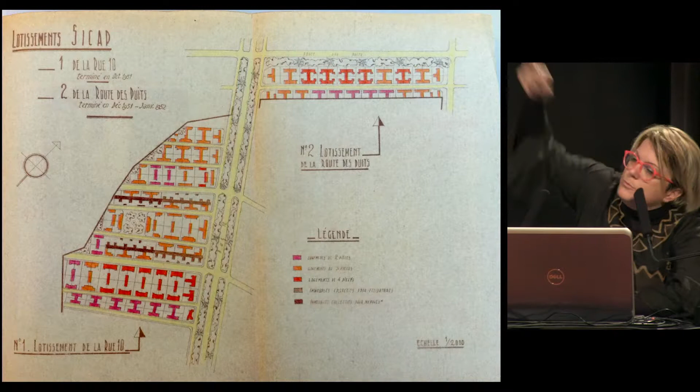So here you can see the first estate on your left, called the Rue 10, Street 10 - named after the street which is now Rue Galliop. And then the Route des Puits, which became Avenue Bourguiba, on the top right - a street that led to the puits, the well, in English.

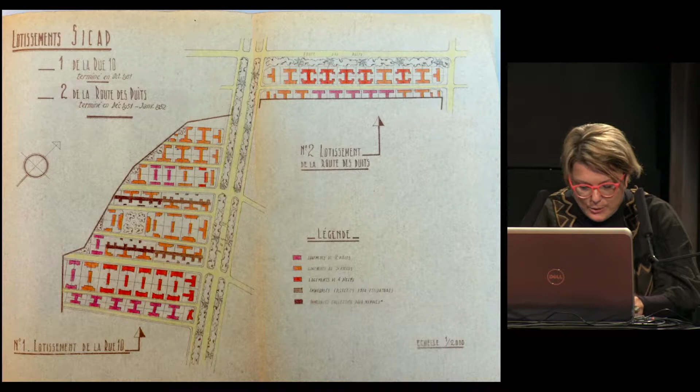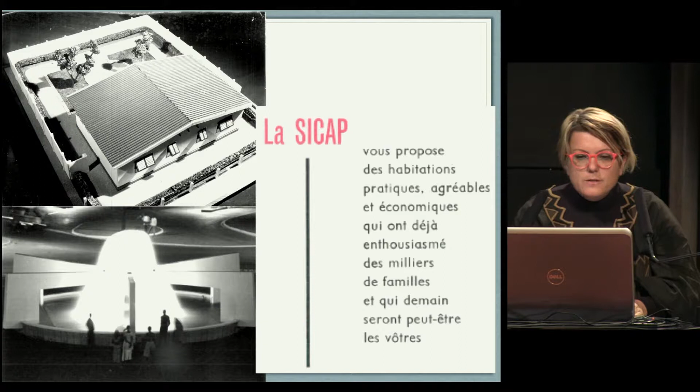So here you can see a model, a high-prestige villa, and below the fountain, where you can imagine people walking around in the evenings. A whole lifestyle proposed with these developments. Here are some green spaces, which are now occupied by recently built blocks. Another brochure in 1996, proposed in Istanbul by the SICAP.

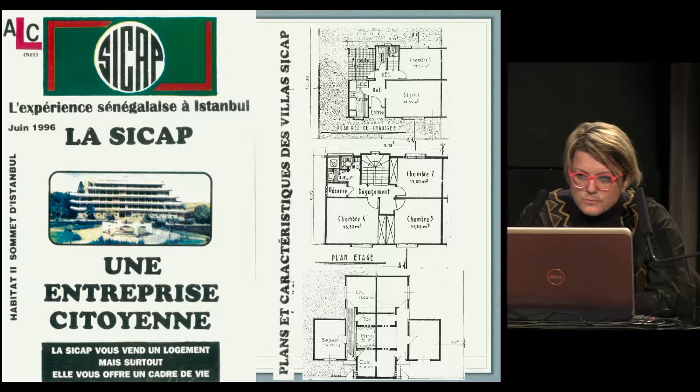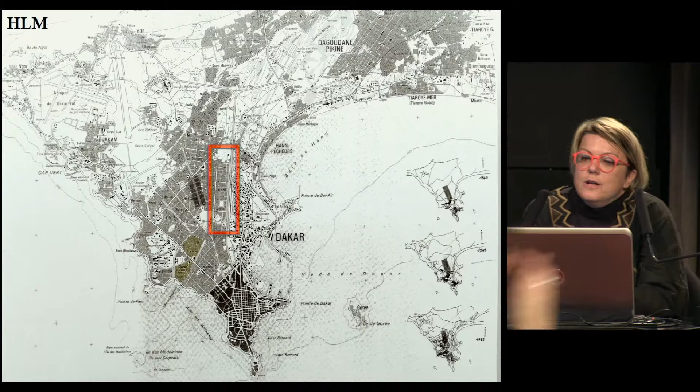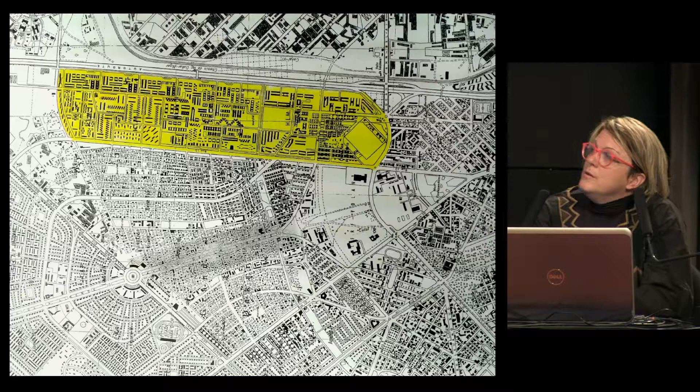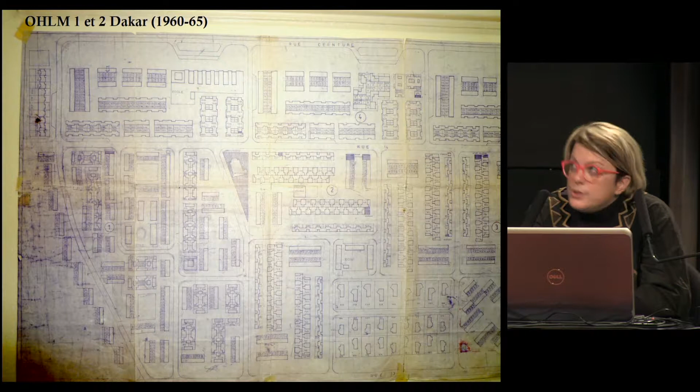So HLM, the second case study, you can see the variations of different kinds of building, different kinds of apartment building and house. This is 1960 to 1965. This is the original plan, which I found in the archives of HLM. I'll go quickly through.

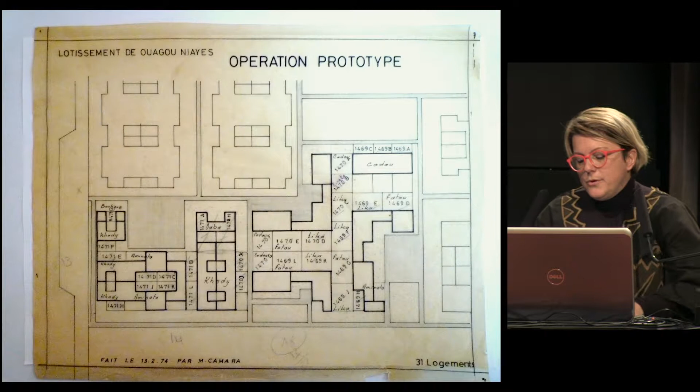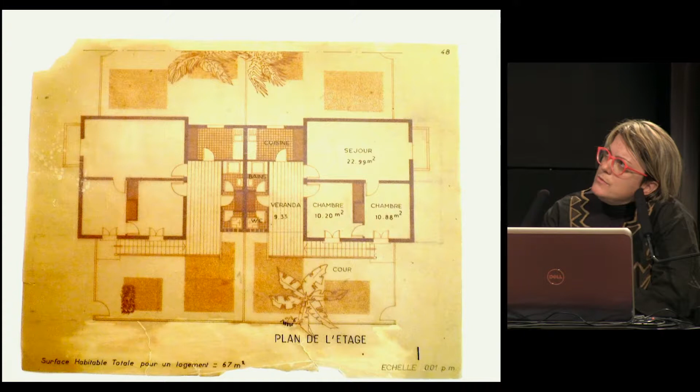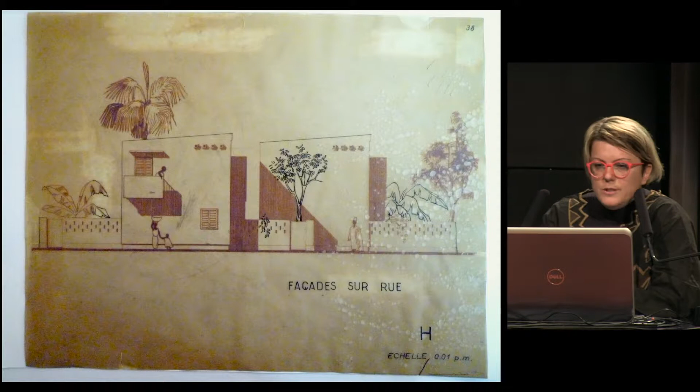So this prototype operation, which was home for the technicians who were working on designing the HLM, that was like a pilot that they carried out. And here are a series of drawings. I found hundreds, but they're not quite filed properly. So you'll have a fairly good idea of the changes that have been made when you look at the photos. For example, the facades, you'll see them this afternoon.

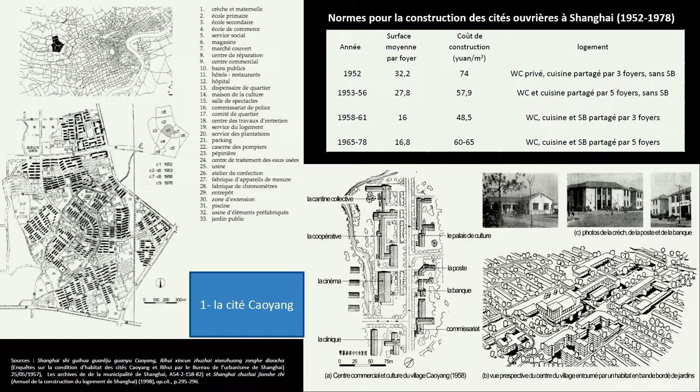What would become of these households, of these houses, these dwellings? Before asking this question, I'd like to present you the different typologies. You'll see a terrific fall in investment and in size. This was presented in Yang Chen's thesis. You can get it from the school.

So here are the different types from the cité here, 1952. There's a certain sociability, a certain quality of the environment and of materials. The idea was really to pursue the dynamic of the new towns of the 1920s and 30s.

But when we look at the new 5-year plans, the aim was to build quickly, the quantified system under the communist system. And of course, at the same time, the aim was to reduce construction costs. And what we see is the standards.

There was a shift in the standards for the new man. We shift to a complete shift to standards based on the idea of reducing construction costs, because we are in a country that does not have the resources to meet its ambitions. Because in Shanghai, we're in a town, in a city.

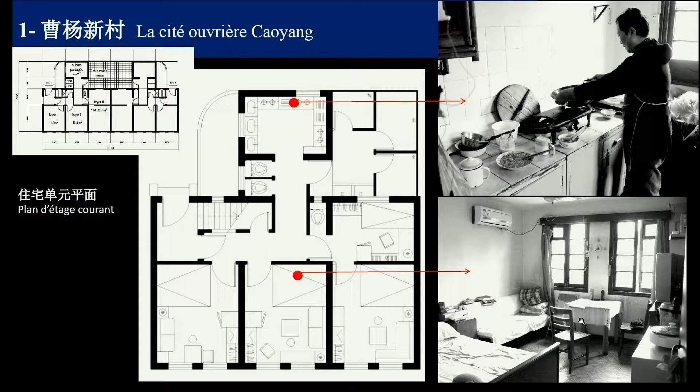So what we see here is a shift from the Lilong built at the end of the 19th century. Although this photograph is quite recent, the dimensions of the rooms are quite generous. The ceilings are quite high. Though this space, with the proliferation of families and family sizes, was going to become much more restrictive. So in the 90s, the major change was in the status of housing.

The initial status was that employers would allocate housing; the employer could be an administrative service or an industrial company. So there was a shift from housing that was allocated to workers by these structures to housing that people could buy. So you can imagine the changes that this brought about. And I'll talk about that a little later.

What we're seeing is a huge burden. How can you house an excessively numerous population? In 1990, there were 4 square meters of space per person in Shanghai.

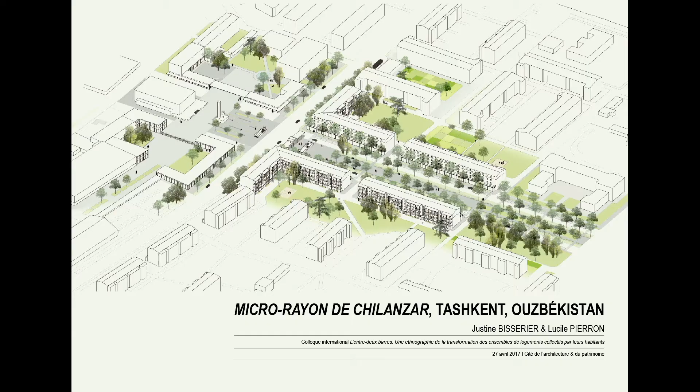We propose that you look at this issue of the transformation of collective housing by the inhabitants through a district built in the Soviet era using the construction principles of the micro-district. This huge complex is called the Chilanzar collective.

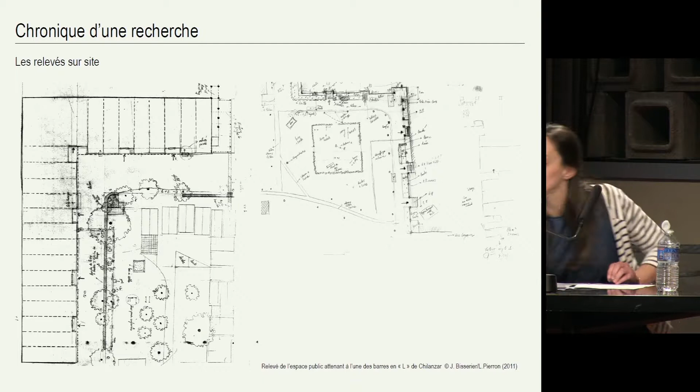So it is this field work that gave us a close understanding of the district, and particularly the practices of the people. This was done through a tool that is excellent for making the comparison between designs produced by architects and the practice of inhabitants.

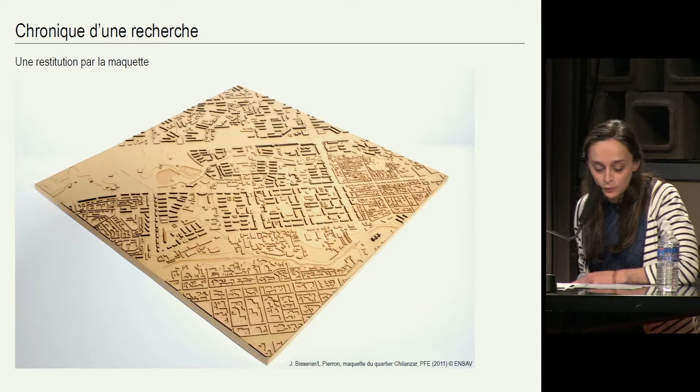So this combined survey of the district made it possible to produce a much more precise plan, as you can see here.

So to study this transition between design space and the space produced and lived, experienced by inhabitants, means that you have to understand the first stages of the construction of the city of Tashkent.

Obviously, we can't be comprehensive here, but we suggest certain interpretations of the morphology of Tashkent, which is very complex, characterized in its urbanization by the juxtaposition of clearly identifiable urban fragments.

First, the city Caravanserai on the Silk Route. Uzbekistan was on the Silk Route. It then became the capital of the Russian Empire of Turkestan in 1865. Then Uzbekistan, a state created by the Bolsheviks in 1924.

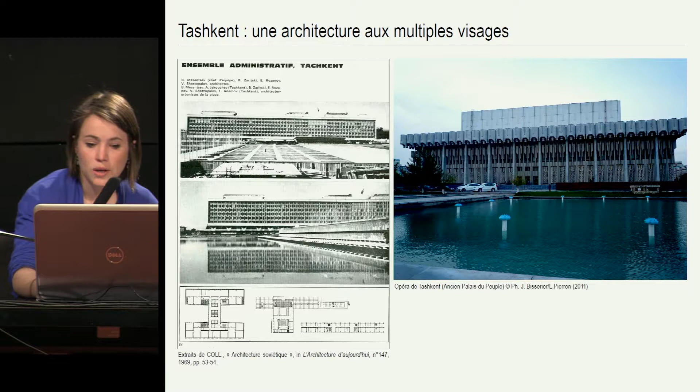And equally interesting objects in terms of their monumentality in the period, with the Tashkent Opera, built in the same period. And then next to it, these structuring objects in the urban landscape, we find these huge collective housing structures built using prefabricated construction methods.

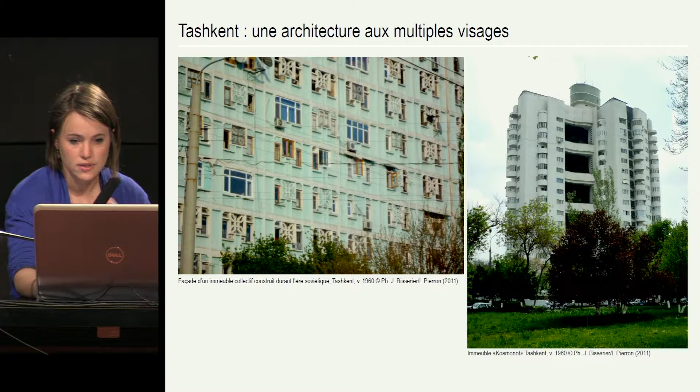So a photograph of a quite ordinary facade. And then we have a tower block, which we found interesting in our two study visits. The Cosmonaut building, which bears witness, apart from this ordinary construction, to a real commitment by architects to renew the architectural language of collective housing, a sort of laboratory of ideas about

habitat in that period. In order to present the district and its presentation, we'd like to take a step back in order to try to understand the space originally conceived by architects and urbanists. So what you can see here is two documents. They're quite rare documents, historic documents, one of the few which we could access, because these are documents that were published. So you have the project plan, where you can quickly see how it's built. So wide avenues, small blocks, within which you find amenities generally.

And then on the side, next to it, a project model, a photograph, which shows the strictness imposed on the construction of the whole Chilanzar district. The idea which you can see with the amenities in the center of the small complexes is the idea of the micro-rayon, the micro-district, the strategic position of amenities within these small structures.

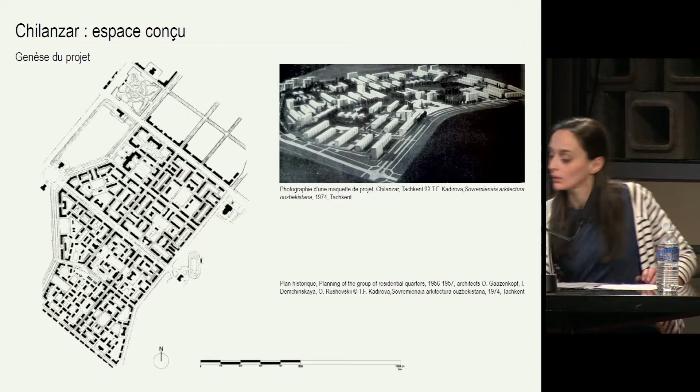The idea is to go back to the super blocks built in 1936 in Moscow, but the micro-rayon, the micro-district, is the smallest unit in the functional city sought by the Soviets. And this model would spread throughout the USSR in the second half of the 20th century. Those of you who've traveled in ex-Soviet countries, you'll recognize this plan.

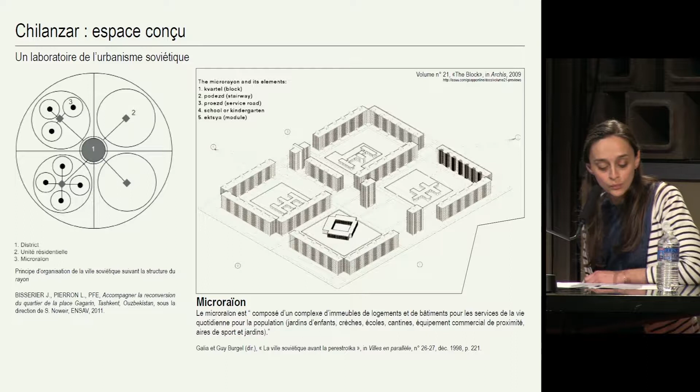The city is designed at 3 scales: the micro-district, the district, and then finally the municipality. So the idea is to start with a small micro-rayon, a micro-district, with amenities, which is designed to be an autonomous unit. The use of this generic and tested model, built on the whole of the Soviet territory until the 1980s, was to speed up the planning process in cities and to guarantee rapid production of several thousand housing units designed to provide housing needs for a fast-growing society.

In the model, you can see maximum distances between dwelling and amenity, so it should be accessible on foot, and so that children going to school should not be affected by cars. So it's a distance of about 500 meters. Here we can show the drawing, which shows the itinerary of children traveling around their micro-district, either to shops, to play areas, or to school.

The dimensions of the new district were also designed to maintain a balance between housing and the different urban services in order to optimize the distance of daily travel. Most of the cultural and community services are placed at an average distance of 600 meters from the housing area. In other words, accessible on foot in less than 6 minutes.

Each residential unit was equipped with leisure amenities like a cinema, theatre, or medical dispensaries no more than 1 kilometer from home, while larger amenities like hospitals, stadia, and administrative centres should be within a radius of 1 or 1.5 kilometers, i.e. 10 to 15 minutes on foot or 5 minutes by car.

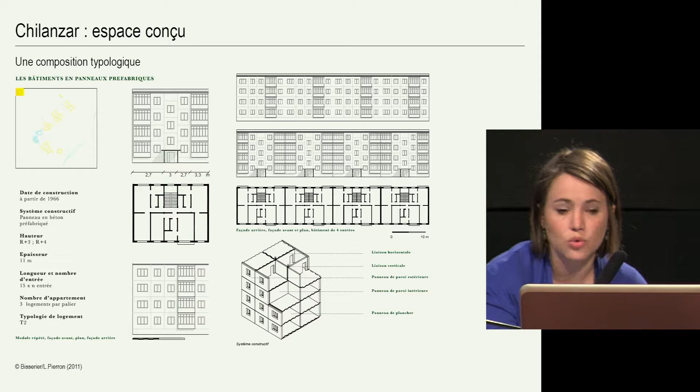In the district initially, and according to the project plan, you only see one typology of buildings, which was envisaged, and only one form of construction method, which is 4 or 5 floor buildings made of brick in the traditional style. But after the earthquake, the new choice made for construction was prefabricated methods of construction, where you have fairly small units as well, remaining with 4 or 5 floors, but using a method of construction that was faster and cheaper. So in terms of identifying this kind of typology, as you can see on this plan, I don't know if you can tell with the colors.

What's important to identify is that all this part you can see on the eastern side corresponds to the first phase of brick buildings, 56 to 66. And after the earthquake, you can see that they were exploring the new construction methods, which are the yellow buildings on the map, on the drawing.

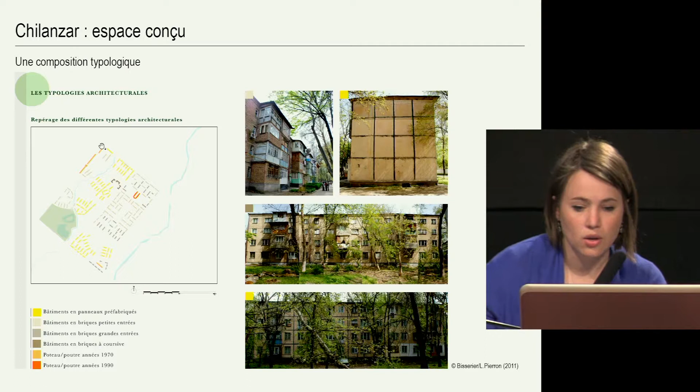So the prefabricated panels you can see here, they're quite powerful images of the construction methods used. They were built either at the heart of blocks, and then on the urban edges they explored a system of larger blocks, and in particular higher blocks, which made it possible to structure the whole of the micro-district.

The rigor we talked about, this typological rigor, strictness, which is obviously imposed by the economic and functional objectives, nevertheless included a landscaping which is quite pleasant and attractive, with vegetation and semi-green areas covering almost 80% of the ground area.

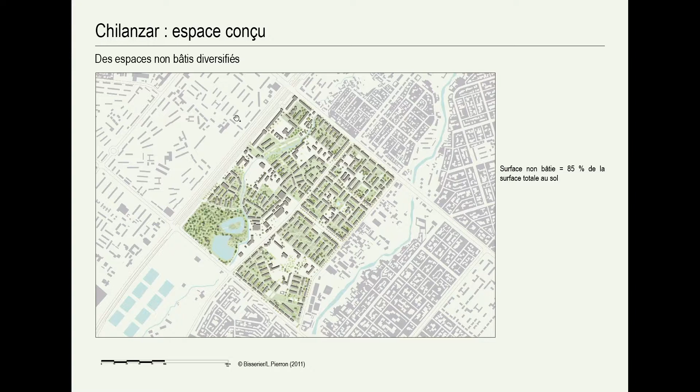These micro-districts are also structured by avenues of trees at the edges of the urban front to form a sort of green belt. The focus on squares and public areas for each of the construction blocks added to the pleasure of the human experience in living there.

This pleasurable aspect of living, which you find in Chilanzar, had a key function by protecting people from the winter weather and also offering cool conditions in summer. So this is something that we found surprising on the ground.

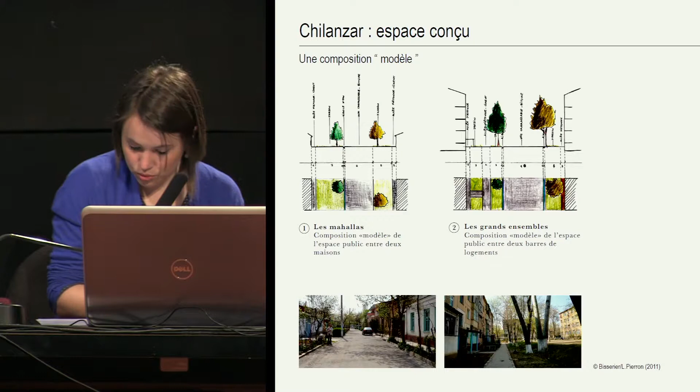On this drawing, you can see dimensions that resemble the grid structure of the Mahalla. So you can see the model is a rationalized model, a globalized model, but there is a tendency, particularly in the public spaces, to return to certain models which existed already in Tashkent and resemble the more traditional districts.

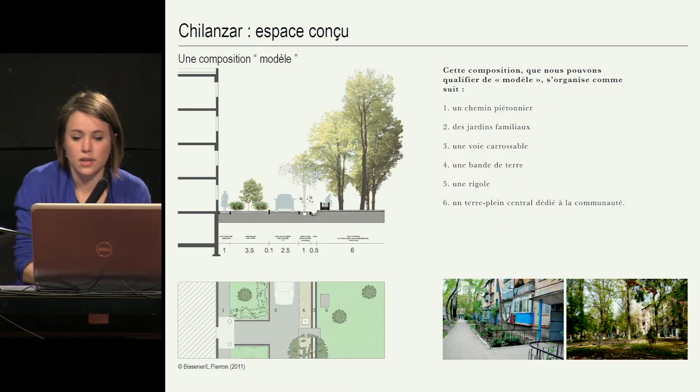And these garden courtyards also correspond to a standard profile. It's perhaps something less known about the micro-district system. There are very clear typologies, buildings based on distance, but there's also a standard design in relation to public space, and this is what we call a model composition, which involves a pedestrian route, family gardens, and then a central space dedicated to the whole community.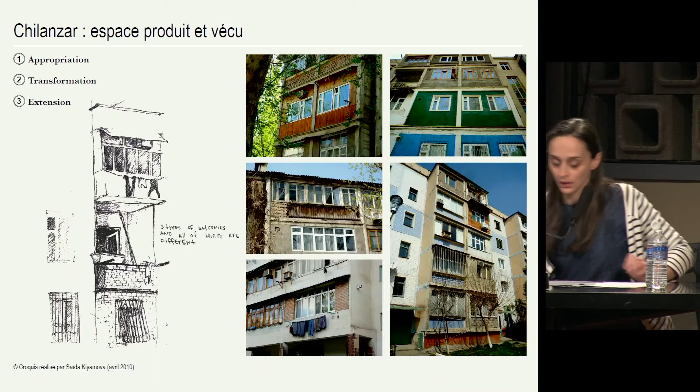So this knowledge of the initial model enables us to measure the changes and transformations that have gone on in the last 50 years, and to understand space as the inhabitants produce and experience it. As in many other public, collective housing areas, there were big changes in Chilanzar. There was a gradual, steady impoverishment of the population, sanitary problems, hygiene problems, combined with poor housing and acoustic conditions.

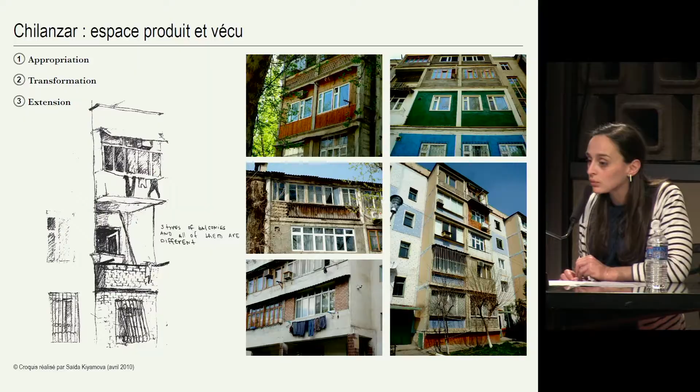So the failure of the Soviet city model to correspond to the needs of Tashkent led to aspirations amongst the people for larger residences, and that encouraged a new architecture that tended to assert the role of the individual in society. So, with the original strict design of the master plan, we see adaptations made by people, which are a combination of appropriation, transformation, and extension.

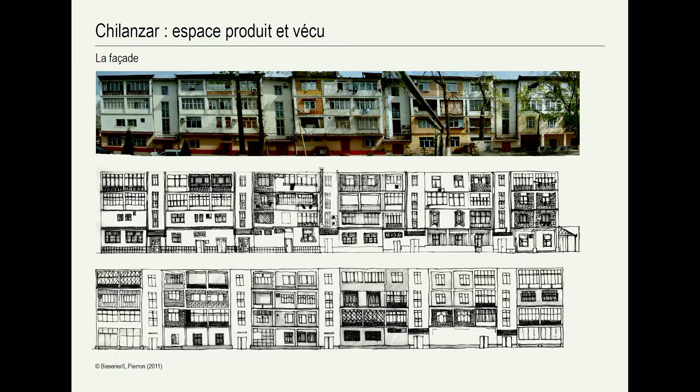So as you can see, there are very major changes in the facades, given their intermediate situation between public and private sphere. So now what we're seeing is a real patchwork of social practices, which reflects a number of individual and collective actions, from ordinary changes to very inventive changes.

So we can see appropriation, and now a total transformation of the facade, creation of private entries, either on the ground floor, which is probably the most common, or even on the upper floors. So you see staircases, and then a third degree, which is extensions.

And here you see a real extension of the home, which is a general densification with the creation of additional rooms, which is really quite remarkable, as you can see on the left. The extension of the loggia, the angle of the mass, or the extension of the apartment on the ground floor, which is perhaps the most common, most obvious type of extension, but which involves a privatization of what was initially a public space.

So this range of variations can also be seen in the loggia, which is generally used in the typology of buildings in Chilanzar. There are a few loggias that have retained their open and maintained spaces, many of them being partially or fully closed in to constitute additional rooms.

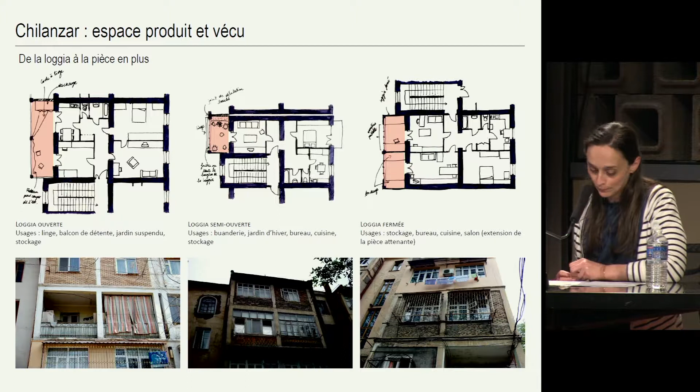And finally, the closed loggia, where the fronts have been closed in with bricks and the rooms narrowed in order to make an extension of the lounge or an additional room giving onto the outside.

So here we see the changes on the facade. There's been no specific regulations on this. As you can see, there's a wide diversity of methods of closing in the facades, which is shown fairly clearly on this photo. And the big concern regarding these modifications is that the initial structure of the building is not really suitable for the changes, and some of these brick enclosures on the loggias can threaten the fabric of the initial concrete structure.

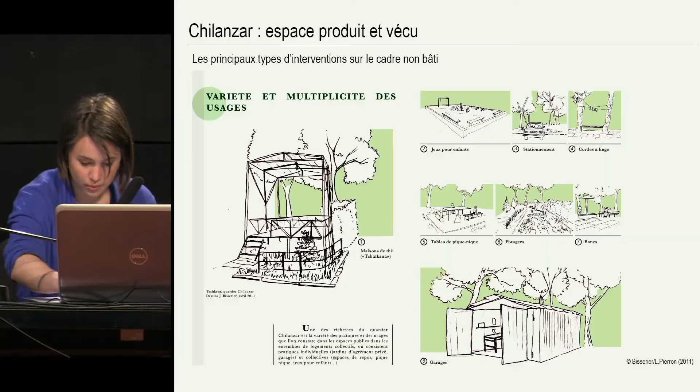So this wide range of changes has huge potential. As you can see on the outside spaces, there's a wide possibility of alternatives, people building their own vegetable gardens, building sheds or terraces. So this external space is the main method used by inhabitants to enrich their social lives and community lives.

So we're seeing a privatization of space designed to extend the domestic space through the appropriation, not to say the seizure, of part of the initially public space in order to incorporate it into the private domestic space. So from this observation, we can see that there's been a change of use, but also a modification of the status of space. So we wanted to work on this delimitation, this demarcation of space, these new boundaries introduced into the public space.

So this is brought about by various forms of barrier, here fences or brick walls or concrete walls, or sometimes less firmly through strings and cables. In addition, there is a slightly different treatment of materials, where people are using concrete, people are using rocks, people are using pebbles to delimit space.

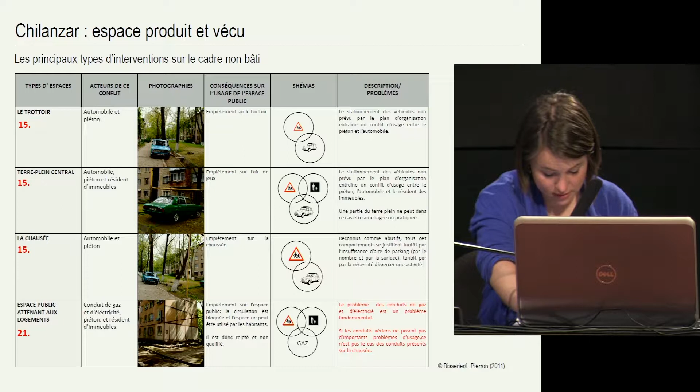And here the final transformation we identified, differentiation in terms of use. This is the question of parking, which was one of the big issues in the initial project, because initially the parking spaces were supposed to be left on the outside of the district, while today, as you can see, with increase in automobile fleets, people are introducing vehicles into what used to be set aside as green spaces, and producing a conflict of uses between cars, pedestrians, and residents.

So what we see is ordinary processes of adaptation with an evolution in the status and perceptions of the inhabitants of Tashkent.